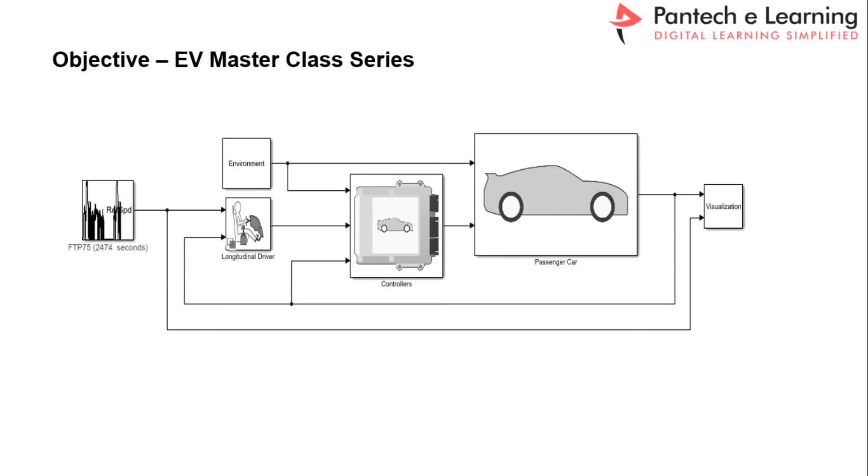Now we will recap yesterday's session on the power flow of the electric vehicle.

The charging station supplies voltage to the battery via the onboard charger. The battery supplies controlled power via the inverter, which is nothing but a power control unit. This topology may vary based on the motor type. For induction motor, BLDC, and PMSM, the configured topology remains the same, but the control algorithm is different. Whereas for SRM, the switched reluctance motor, the topology is different, as well as the control algorithm.

Looking at the slide for the electric vehicle, the components are very simple: vehicle structure and tire, and the rest is motor, inverter, and electrical parts. If you know the details about this domain, then definitely you are eligible to be an electric vehicle engineer.

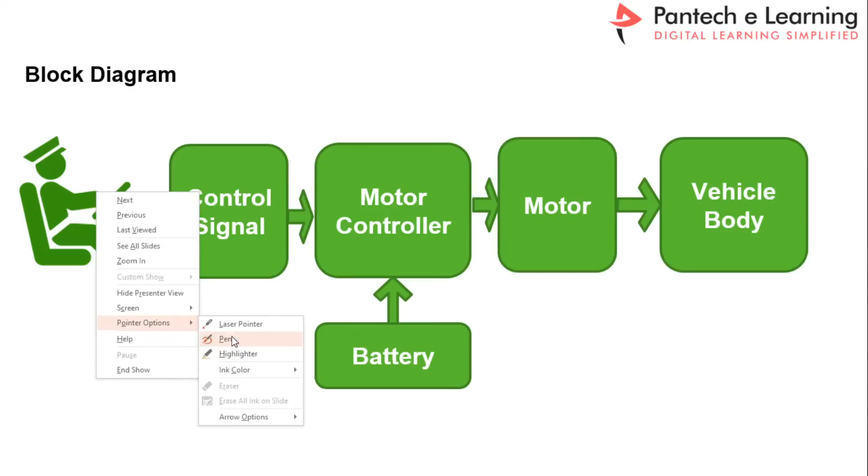If you take the control block diagram of an EV, the driver applies a control signal, meaning the PWM input block. PWM is nothing but pulse width modulation. This controls the motor whenever applied to the motor controller, which is the power control unit.

This is the PCU - PCU, power control unit, inverter, or traction inverter - everything means the same thing.

The controller receives input power from the battery. For example, if the battery supplies 48 volts, based on the PWM percentage, that 48 volts is controlled, and the motor receives 0 to 48 volts. When the motor receives full voltage, the motor speed will be high. When it receives 0 voltage, motor speed will be 0. This is directly proportional to the PWM - when you apply more PWM, the motor speed increases.

You can use any kind of topology based on the motor controller. For example, for an induction motor, you can use a three-leg inverter like 2-level, 3-level, 5-level, multi-level, whatever you want. The only thing to ensure is that the topology can handle that much amount of current. That's the only requirement; the rest you can do.

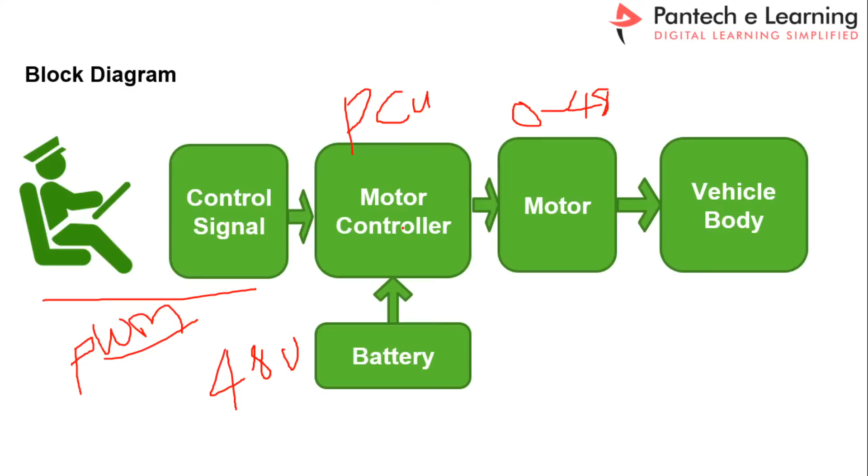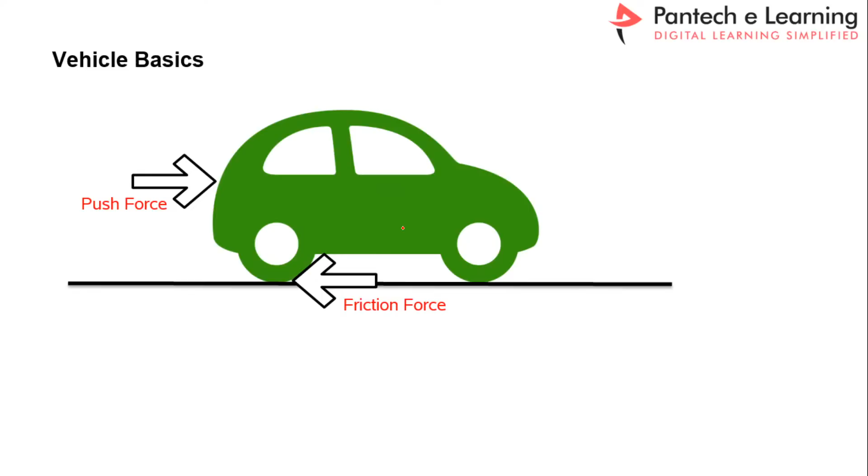Let us recap yesterday's class. To understand vehicle basics, if you want to move the vehicle from standstill to movement, there will be a force calculation. One is the required push force generated by the motor. By default, due to vehicle dynamics, there will be a friction force that acts as an opposite force to the push force - that is a negative force. All these forces together are the tractive forces, which we must calculate. Whenever you overcome this tractive force, only then will your vehicle move from one position to another.

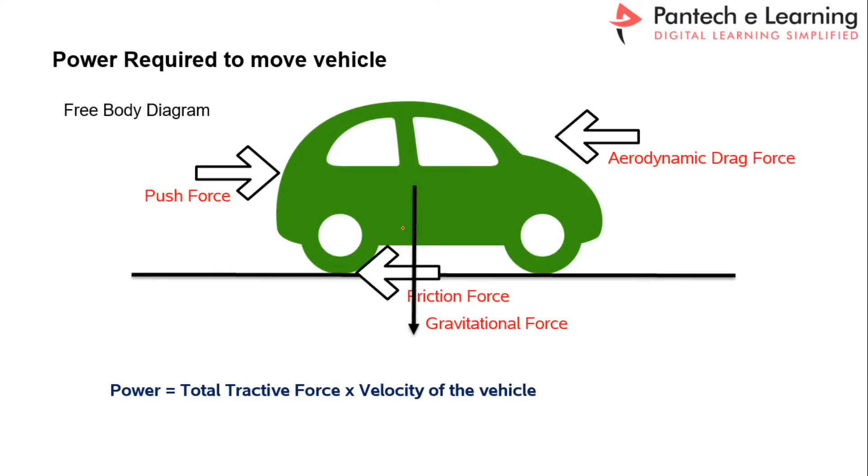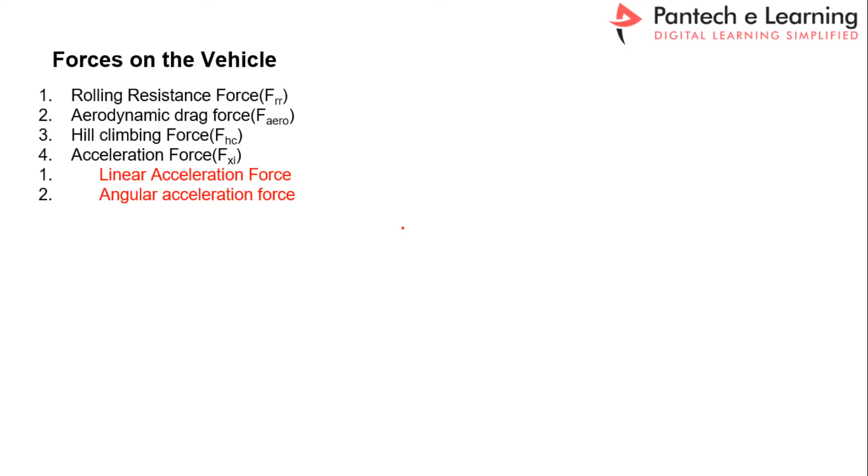Now let us take the detailed analysis of the total tractive force. The total tractive force is the summation of rolling resistance force, aerodynamic drag force, hill climbing force, and acceleration force. Each force has its own limitations.

How can we understand this? For the rolling resistance force, whenever the tire rotates on the road, due to the road type and tire dimension and tire pattern, the rolling resistance constant may vary.

Due to that behavior, we can calculate the rolling resistance force, and the same way for the aerodynamic drag force. This force is directly proportional to the vehicle design, so this is also a negative force.

Each and every force has limitations, and there is an exact formula to calculate the total power. The same way for the hill climbing force, because our road is not sufficient, it's not a flat road. Whenever the road grade angle varies, the vehicle needs more power. If it's a downgrade angle, the vehicle does not need more power. Whenever it's an upgrade angle, the motor needs a huge power to climb the region.

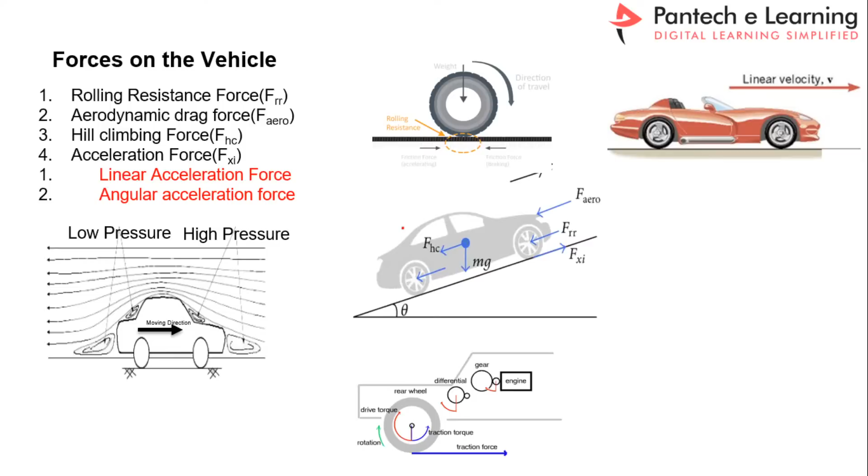Same way the acceleration force - linear acceleration as well as angular acceleration. Because when the motor generates power, that entire power should transfer to the vehicle, and in between there will be a lot of opposite forces, so that force you have to take into consideration.

Same way for the aerodynamic drag force - here half is the constant, and rho is the constant, that is air density. Wherever you go, the same value will be there. And CD, this is nothing but the drag coefficient, that value you can derive from the vehicle design.

Based on the vehicle structure, you can choose this value. And the area of the vehicle - if you multiply height and width, you can get the frontal area of the vehicle. And V is nothing but the velocity of the vehicle. These are all the specifications of the particular vehicle.

Same way for the hill climbing force, here we need only the M value, that is the weight of the vehicle we need. And the same way for theta - you can keep either 20 degrees. 20 degrees is the safest grade angle for the commercial vehicle. For off-road vehicles, you can go up to 45 degrees, not an issue at all.

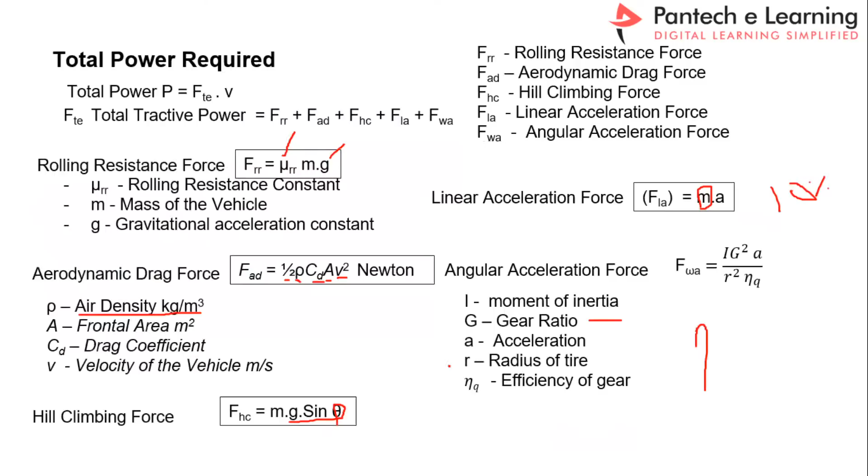Nivin Tangavila, drag force couldn't understand. So drag force is nothing but the opposite force. See here, this is the drag force. When the vehicle is in the running condition, the air will be in the opposite direction. Due to the vehicle structure, a low pressure area will generate, and this will stop your vehicle.

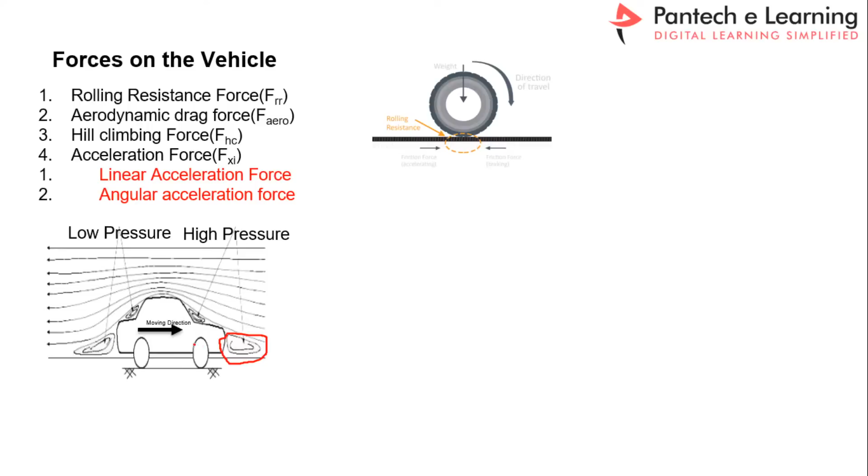So now we are in the position to calculate how much force may generate while it is in the running condition. You can calculate with the help of this formula. Right, this is the formula. So here we simply apply this value, then you may get the drag force. I hope you understood.

Yes, thank you. So now we just move to the next one. So this is the EV types: electric cycles, scooters, electric rickshaws, electric cars, and electric trucks. These are all the types of vehicles.

Now let us check what are all the maximum, what are all the types of motor which we have to select. Right, see here, for the electric cycle you can use any type of structure. For the motor, if you take electric cycle, you can use either PMDC or BLDC. These are the types of motors widely available. Based on the type you can select.

Right, same way for the controller. See here, the controller depends on the battery voltage and the motor power. So you may require the controller. It's nothing but a power control unit. In another way we can call it an inverter or converter.

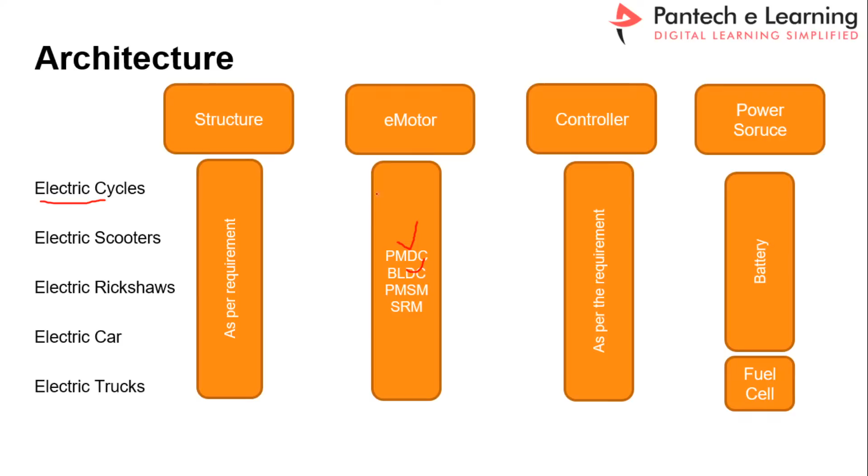And the power source, up to the electric car, the battery is the main source. Whereas for the heavy vehicle, that is the electric truck, in addition to the battery, the fuel cell will be the additional source. Fuel cell will be the additional source to the battery.

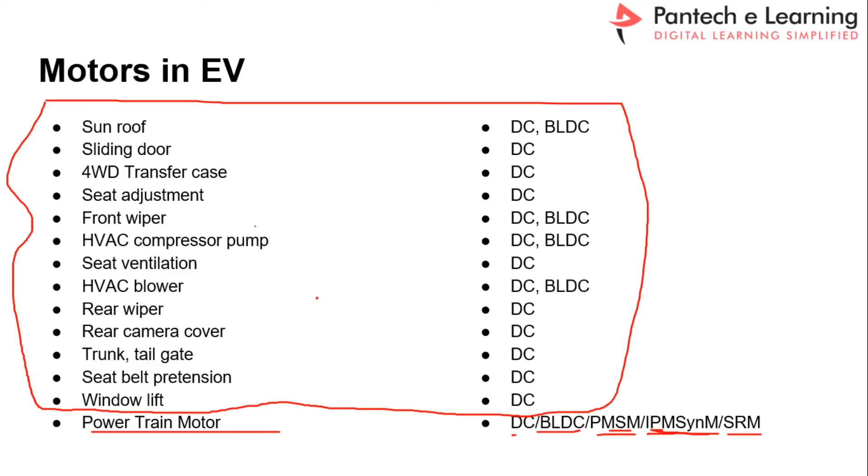So these are the motor types widely used in electric vehicles. In a single car you may have all kinds of motors, so you can choose based on the vehicle type. I will cover each in detail in the motor domain sessions.

Push force and acceleration force, are they the same or different? No, they're not the same. They are different. Acceleration is the opposite force, while push force is the direct force.

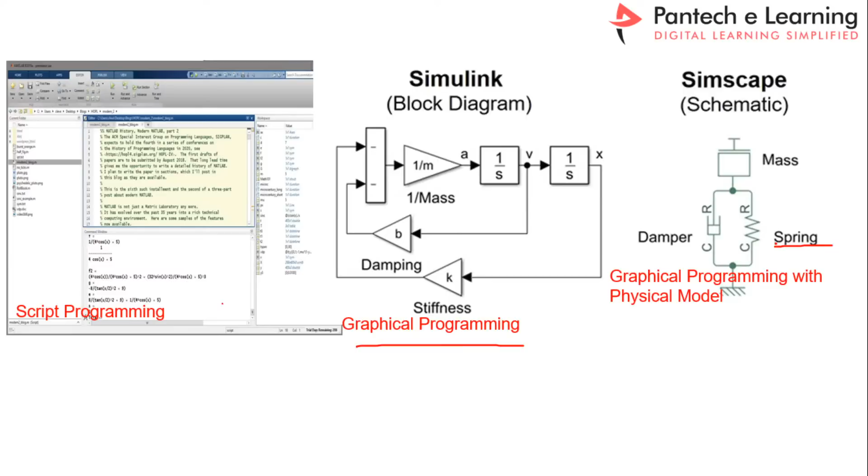For example, if you take a spring model, the spring block will be available. You simply take a mass spring and interconnect it with another physical model to get a result. Whereas in script programming you should develop a formula and finally convert it into a block—you have to write a script from your formula.

In MATLAB you can interconnect anything within a single program—either script with graphical programming, or graphical programming with script, whatever you want. Such facility is available in MATLAB Simulink.

Before that, if you want to download MATLAB, I will show you the demo window. Just go to Google and search for MATLAB free trial.

For installation, same way, you just go to YouTube and search MATLAB installation. There you can get a lot of videos. Also on the MATLAB site itself, there is detailed step-by-step information on how to install. You can use any one of these videos.

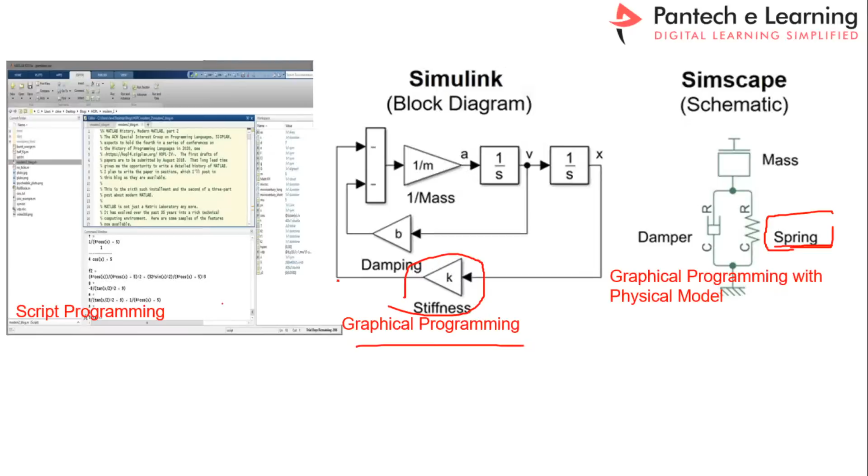I hope you got the point, right? Yes. So now let's move to MATLAB.

I will show you MATLAB. For the script, suppose if you want to do a simple mathematical calculation, like a is equal to 10, and b is equal to 20.

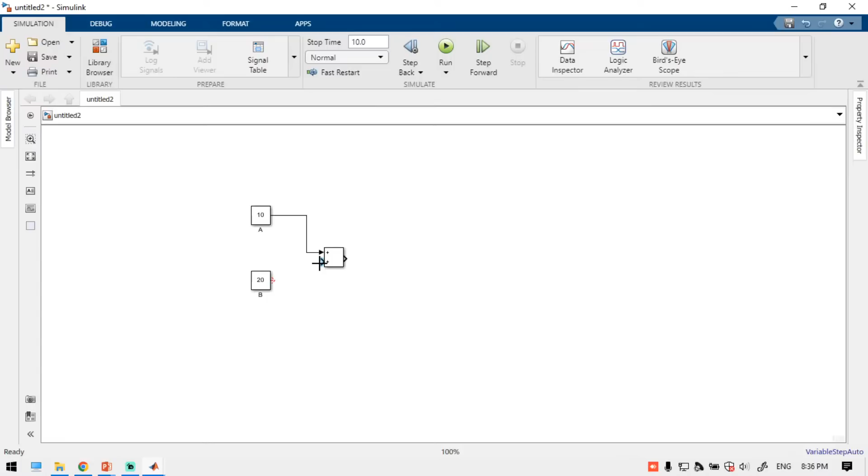each into the block. So now we have to know the results, so for that, again go to the sinks block, where the display model will be there.

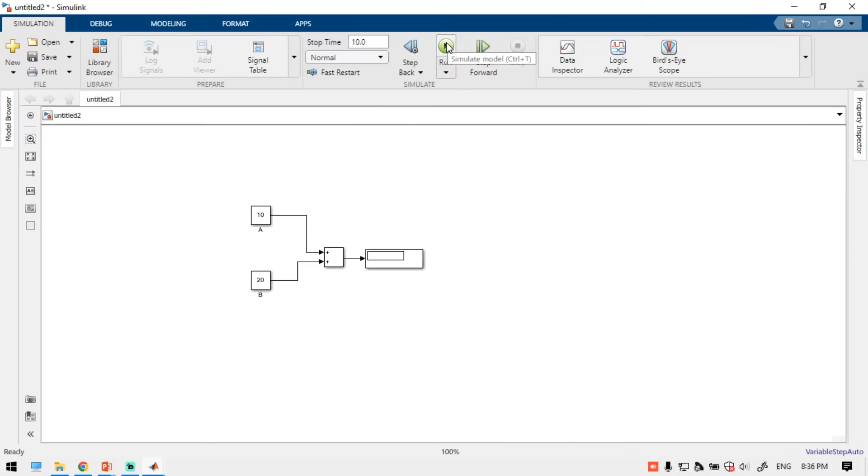Right, so if you run this simulation now, you just click to get the result. Just run this simulation. You may get a result. See here, the 30 is the final value.

So whatever we verified here, this is the script programming, and this is the graphical programming. Simply we can understand this is the graphical programming and this is the script programming, right? So do you have any questions?

Oh my god, buffering started again. No, the software takes a lot of memory, laptop memory. So sometimes you may feel that whenever I access the software, it's lagging. But don't worry, this video will be there, so after the class you can also check.

Yes, thank you, participants, if you have any questions you can ask. So the link between script and Simulink - yes, exactly, Mr. Lognathan. So we can call the script from the Simulink.

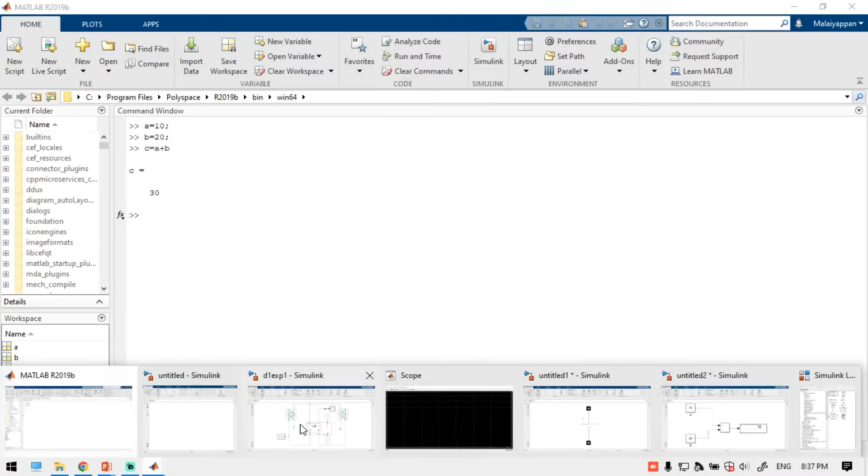Yes, so now I will help you to develop a vehicle model. So this is the simple vehicle model. Yesterday we just saw the result, but today we will develop it one by one.

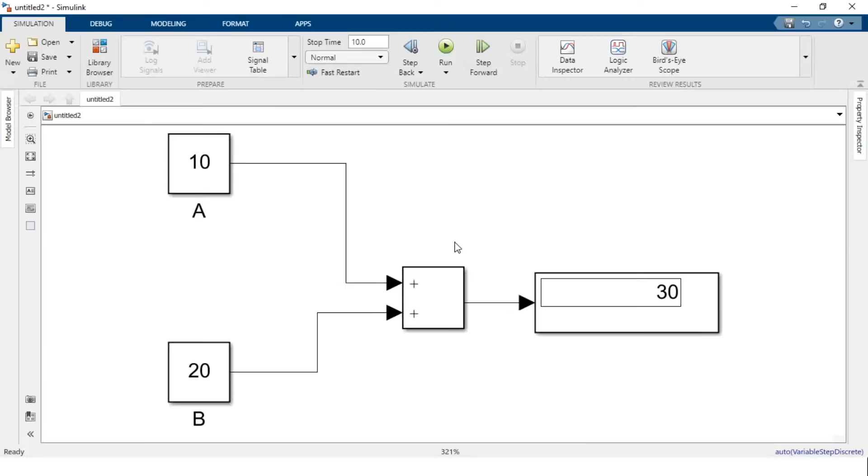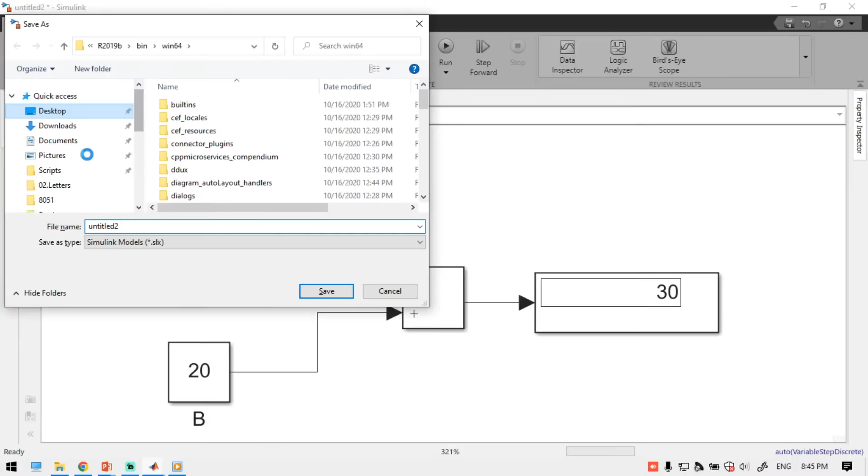Now I will introduce another experiment, I will give you another experiment. Let us save this simulation, just save the simulation here. Experiment 1, just save it.

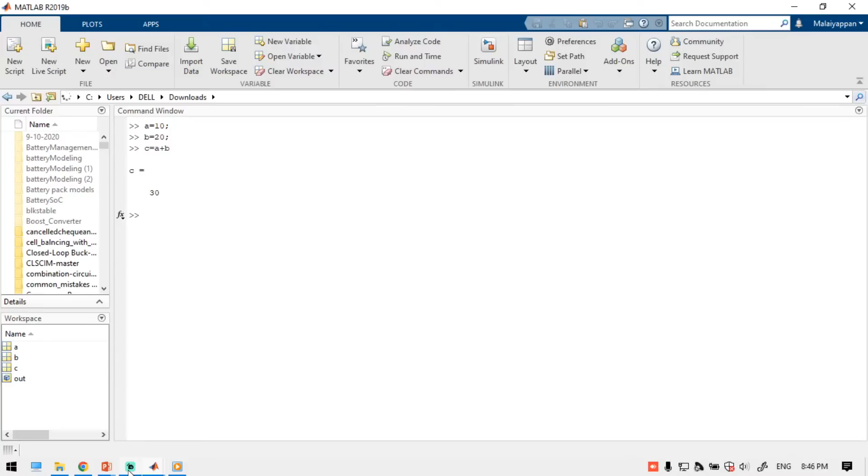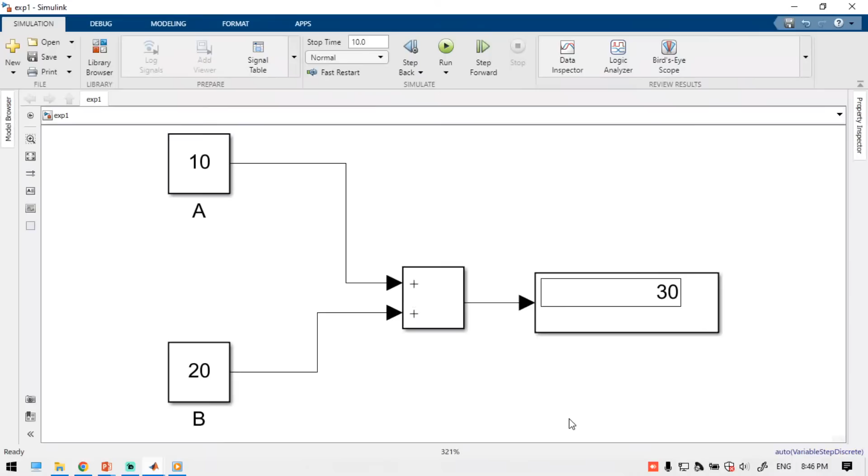Just take the folder and apply here. You may get a project path and all, everything you will get here. Just a second, my laptop is taking much time. Yeah, so this only we used it. So now we can have a... okay, see here.

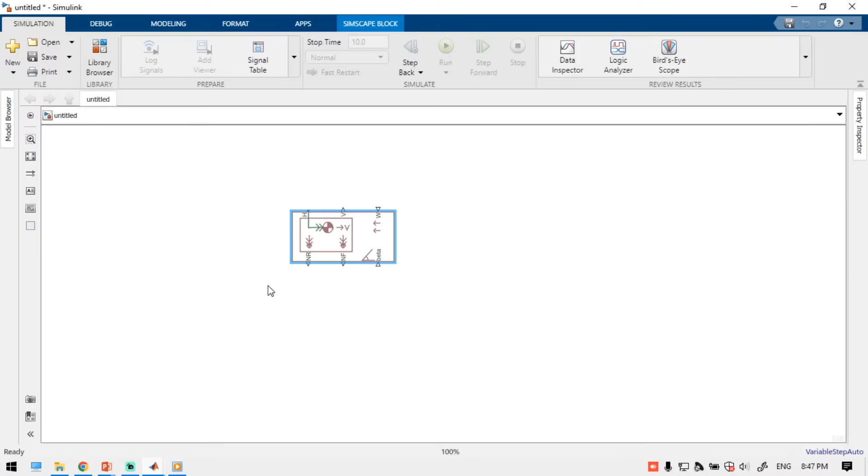I'm going to give you another experiment called vehicle modeling. For that, first we need a vehicle body, so just search vehicle body. Can you see this image? Just comment in the comment box if you can see this image. Just search vehicle body, this is the vehicle body.

So here in the vehicle body there are a few terminals. This is called vehicle, that is the force transmission for the rear wheel, and this is the force transmission for the front wheel, which means you have to connect your tire with this block, and this is the hub. So the vehicle structure, the main hub, you have to connect via this link.

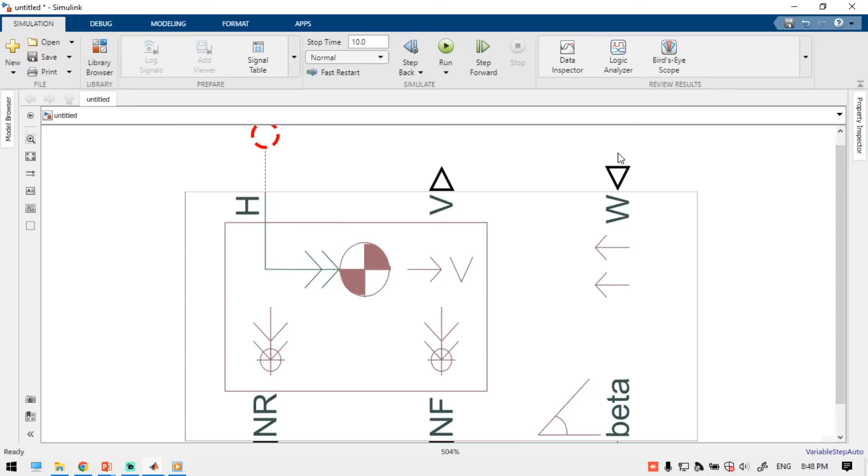And this is the velocity block. We can measure the vehicle parameters, like the speed of the vehicle and RPM, everything we can measure at this moment. Second, this is the wind input, which means we can test the vehicle for high power, high wind flow situations, we can feed the input. Same way for terrain effects, we can apply the terrain effects, because all the parameters we need to feed the value so that we can simulate the vehicle in a very excellent manner.

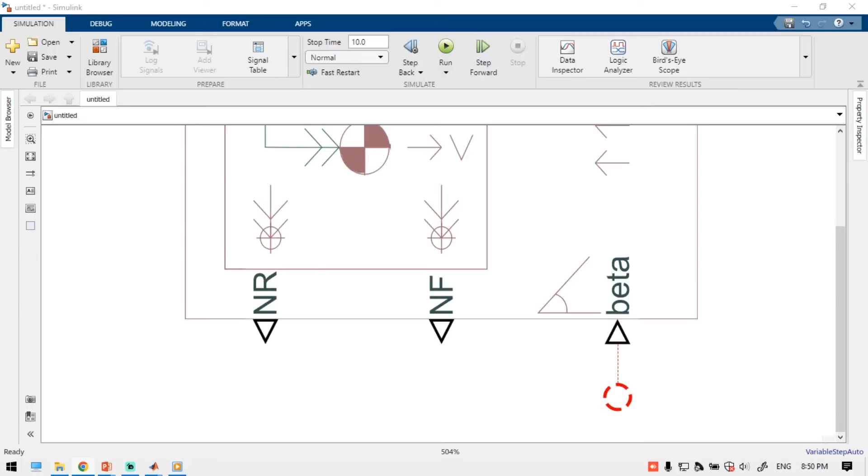All right, so now let's move to the next one. Here, vehicle structure, we have connected the vehicle body.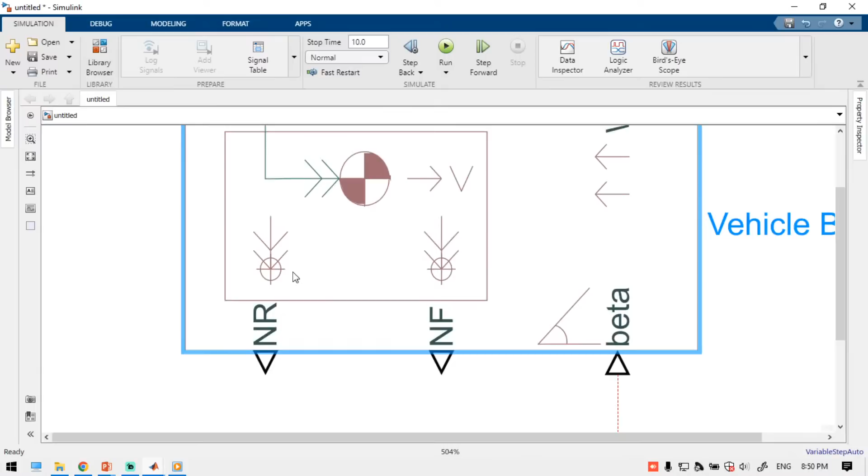Now we have to take a tire model. Just double click in the workspace, you can get a window like this. Search tire, TIRE, so that different types of tire models will be available. Just take the tire magic formula, take tire magic formula.

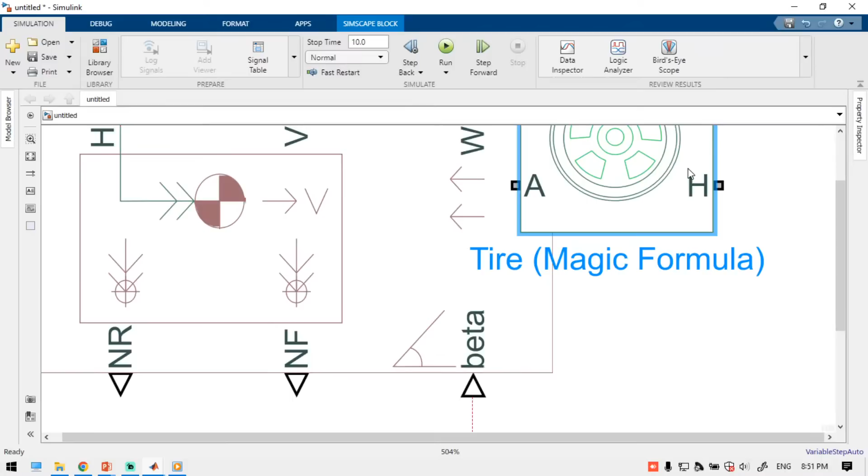So here, we need to take two different values. We have to apply the value of the vehicle. So from yesterday's class, we are going to use this simple sample data to feed the values to the vehicle.

Just double click the vehicle body. Here you can apply the vehicle's total weight, total mass of the vehicle: 80 plus 237, in kilograms. And number of wheels per axle.

Let us assume this is a simple two-wheeler system. So now you just apply 1 in the per axle. And horizontal distance from the CG, center of gravity, to the front axle. So what is the distance for the front axle?

For that, take a millimeter value. Since we take mm, the front axle value is 1520 mm, so you just apply 1520. And the second, the rear axle, again 1400. From this you can get the length of the vehicle - this is the exact length of the vehicle.

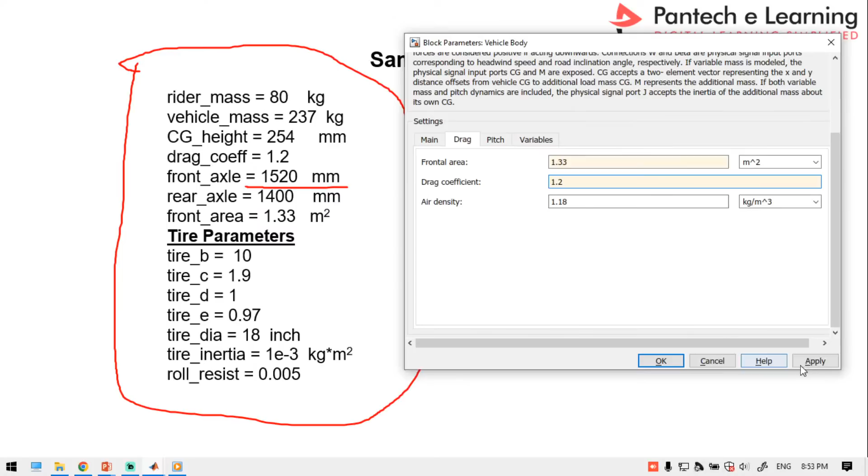And then drag coefficient - here the drag coefficient is 1.2. Since it's a half car model, that much coefficient will be there. So here we can apply this value. Rest, no need to change anything, just apply this value and take that one. So now the vehicle body is configured.

Now we have to configure the tire. From the sample data, you have to configure the tire. Let us assume this is the front wheel. Just connect the force transmission port and take a tire parameter.

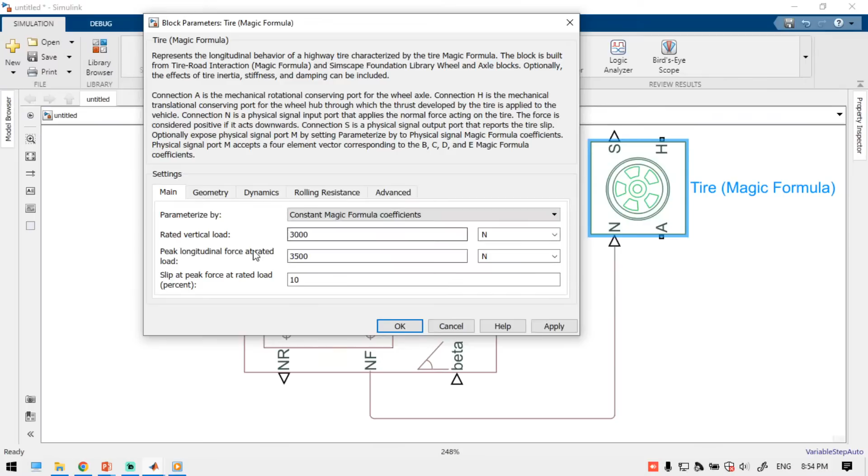See here, if you take this constant, that is the constant magic formula - this is the simple logic. We are not going to discuss tire modeling; whatever tire is available in Simulink, we just take that one.

So here you can apply the rolling resistance block. What is the rolling resistance? From our experiment, we took the rolling resistance as 0.005. This is the value.

And geometry, the rolling radius - what is the radius of the block we have to apply? The tire diameter is 18 inch, so you just apply 9 inch. Rest, you no need to do anything, so simply apply this one.

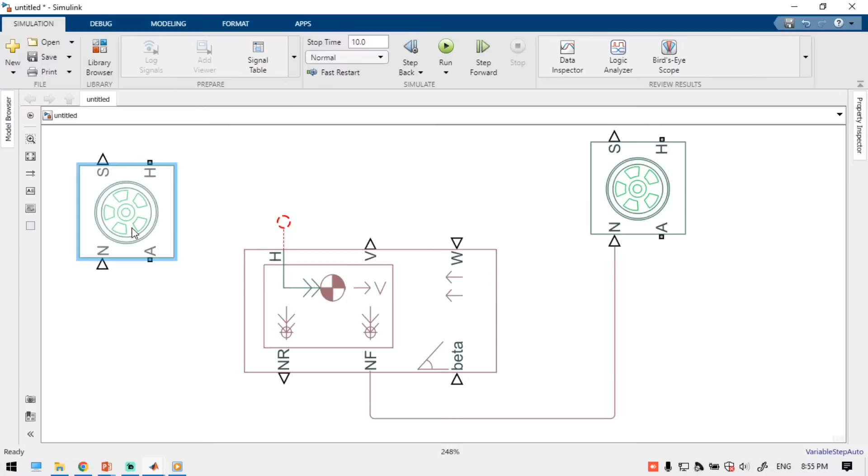So now you have connected the front wheel. Just take a copy for the rear wheel - this is the rear wheel connection. Now the vehicle is properly mounted with the hub, I mean with the vehicle via the hub. So this is the measurement port, and this is the measurement port for this tire, and this is the motor connection terminal.

So now let us assume that we are going to simply park the vehicle with the free end, rotational free end, not with the motor.

Mr. Deshmukh, you just call me after this live. I will share my WhatsApp number.

So now simply we are just keeping the vehicle in position. We are going to test the vehicle for different terrains. If it is a zero value, that is a flat terrain, then we may observe what is the response from the vehicle.

So now just take a rotational free end. Just connect here and take that one. Just take a rotational free end.

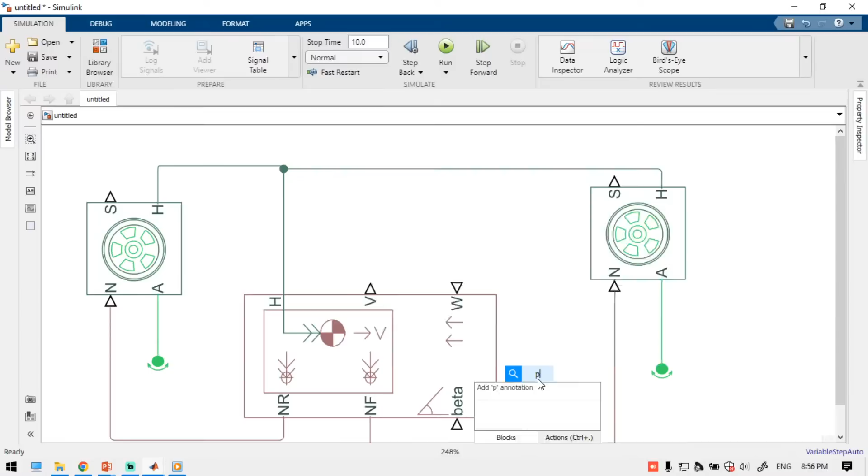So now we have to apply a wind input and then terrain effects. Just take a PS constant - this is the constant input. Here we can apply it. Since it's an angle, there will be a unit called degree, but by default MATLAB will have radians.

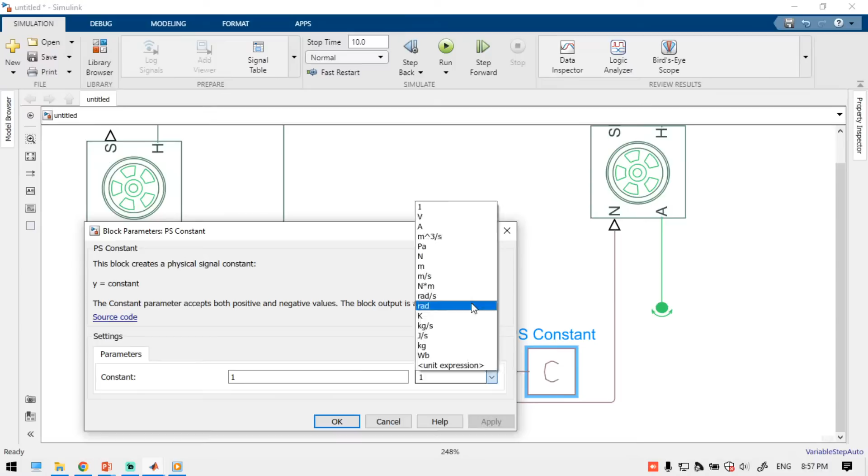You can apply it so now the road is the flat surface. The road is the flat surface, so I applied the zero value. Same way for the wind input.

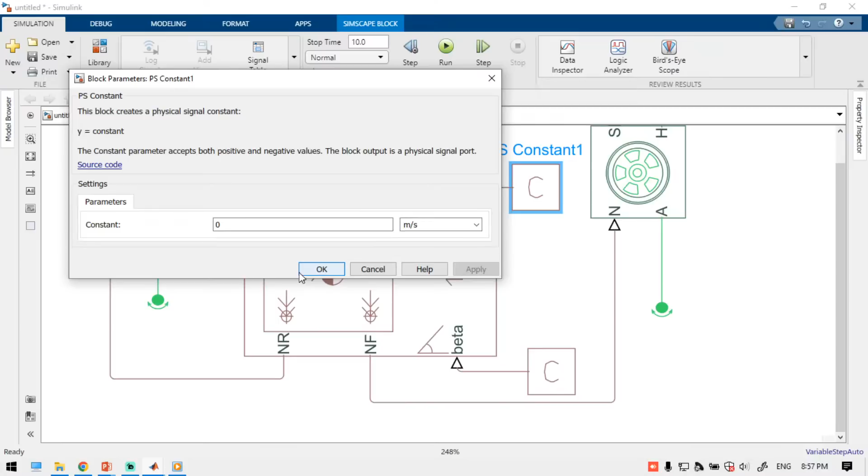Scope - nothing but in your electronic laboratory there will be a CRO, right? So a similar kind of item, this is called scope.

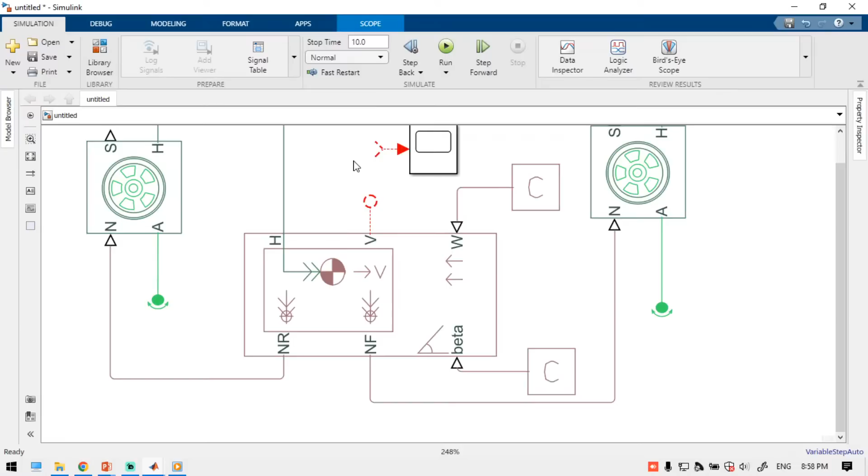So this is the power system block. Straight away you cannot connect this block. In between you need a Simscape to Simulink converter. Just search PS to Simulink converter - this is the PS to Simulink converter. Via this one you can connect.

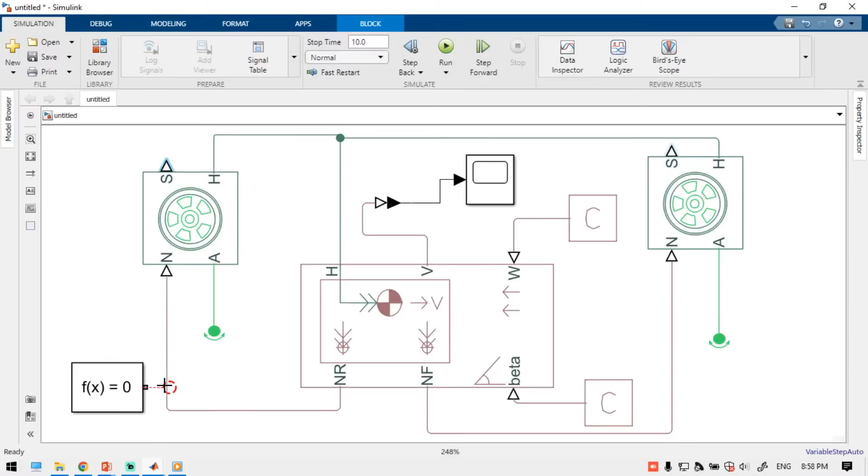So now the vehicle has been structured, and we have to connect the Simscape library block. For that, the library block name is solver configuration. Just search the solver configuration and connect it here. No need to do anything else.

Now we are keeping the vehicle on a flat surface, which means the vehicle will not get any movement. If you change the terrain to a down gradient or up gradient, then the vehicle will get either a positive movement or negative movement - that is called forward running or reverse running.

So let us check. Just increase the simulation time and try to run this simulation. Yeah, see here the scope, we got the output. This is the zero value, right? Because the terrain is flat surface.

Now I am going to introduce the negative gradient, nothing but downgrade slope. Let us assume negative minus 0.5. So if the vehicle is on the down gradient, what will happen? The vehicle moves forward again, so in that case we may observe the positive speed graph. See here - this is the positive speed of the vehicle. Earlier it was zero, now it is positive.

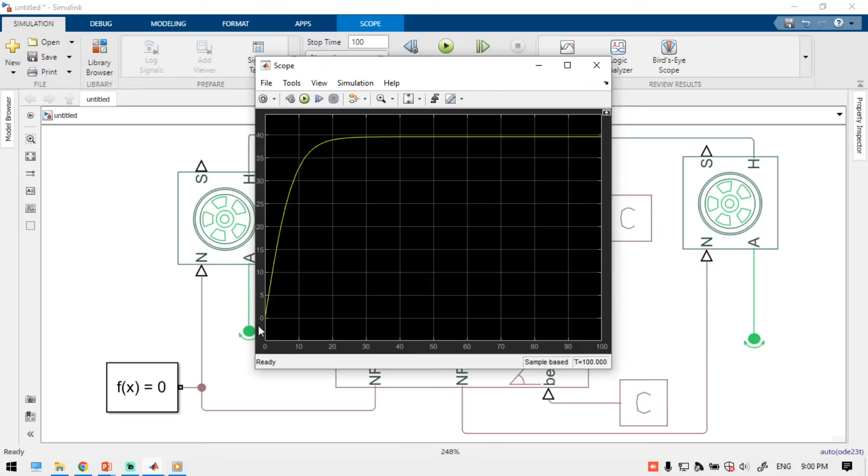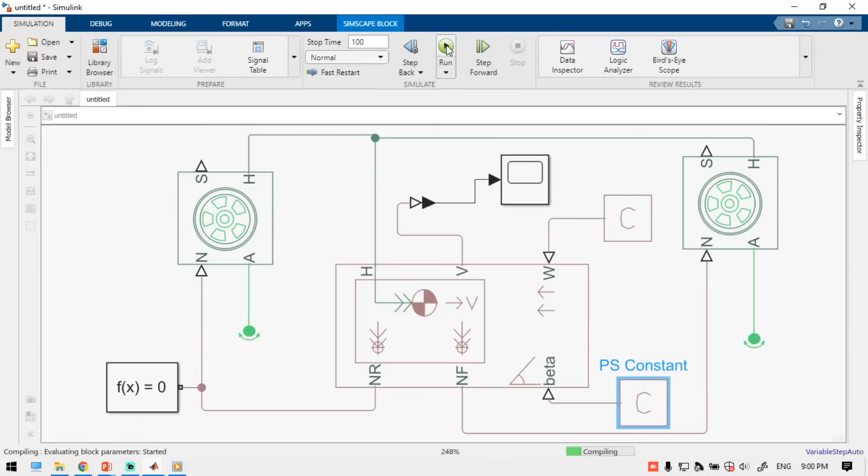Same way for the up gradient - let us assume 0.5 radian in the up gradient, which means the vehicle is on the up gradient. In that situation, what will happen? The vehicle moves in the reverse direction. Yes, see here.

So earlier it was zero when the terrain was flat. When the terrain was in down gradient, the speed was positive. When the terrain was in down gradient, the speed was positive. Now the terrain is up gradient, so due to that the speed is negative graph, right? I hope you understood.

I hope you understood. If you have any questions, please ask me. I will try to give you the answer.

If you have any questions, please ask me. I will try to give you the answer.

For commercial vehicles, Mr. Ian Raj, the best battery voltage is 300 voltage. Commercial vehicle, that is called heavy vehicles.

If you have any questions, please tell me again. The f of x is nothing but the solver configuration block, which means in this particular simulation we are trying to use. There are two components: the Simscape component and the power system component, which is the Simulink component. For this work environment we have to configure the Simscape component, which I am going to use. For that purpose we are calling the Simscape library, because the Simscape component uses physical values. So we have to tell the simulator that we are using the Simscape component, and configure the simulation step size for various ranges. Like that you have to configure.

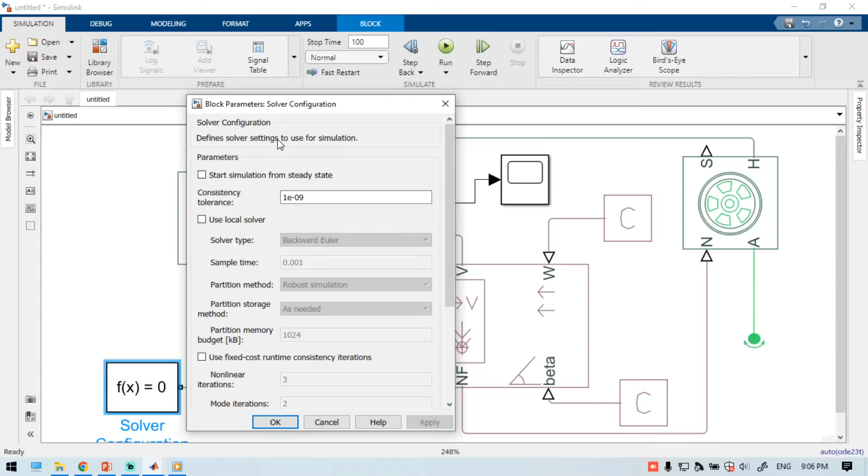For that purpose we have to add the block. Wherever you are using the Simscape block, it comes up with a different color, whereas the Simulink block comes up with only one block color. I hope you understood. Simply interconnecting the block is enough for defining the value.

Why is the graph showing a constant value at 40? 40 is the speed, the vehicle velocity. Once the vehicle reaches its saturation limit, the speed will not increase further. So at a constant rate it will move on.